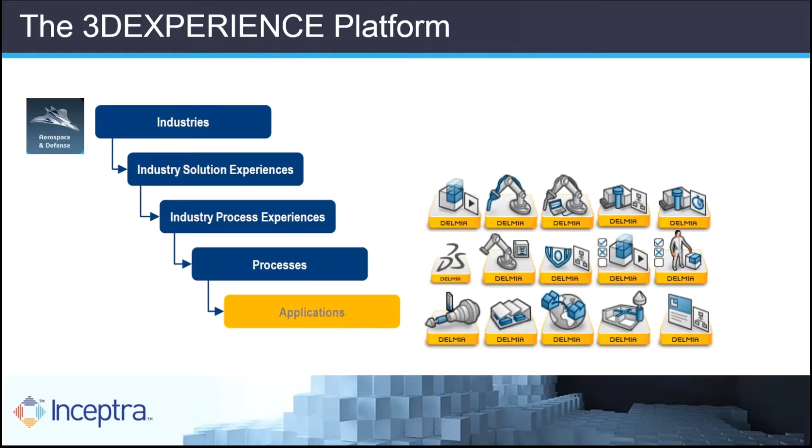There are four main manufacturing processes I'm going to focus on - these are manufacturing related. I'm going to touch on prismatic machining, milling machining, multi-axis, and mill turn. If you want to think about it in V5 terminology, these can be almost compared to workbenches, except now they're applications under the Delmia platform.

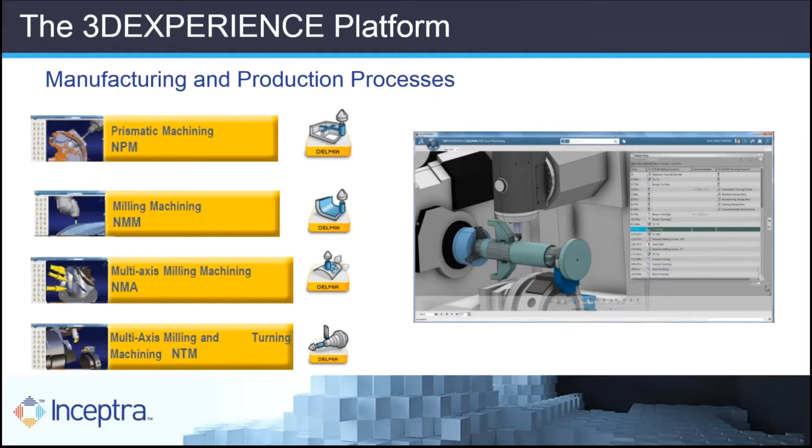And there are a number of advantages this gives us now that these are applications under 3DEXPERIENCE. I wanted to take a look at some of those key values, kind of explain where the differences are and what's new in 3DEXPERIENCE.

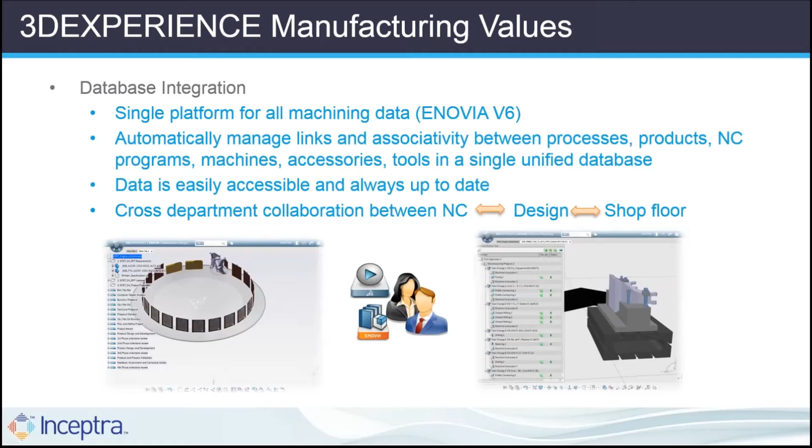So that's one of the key differences in 3DEXPERIENCE. We're now working with the database, and it's not file-based anymore. So let's take a closer look at the resources specifically.

The method in which we go about programming in 3DEXPERIENCE has changed. Our goal when we actually program a part is to first make sure we're using the correct machine tool, and make sure the resources such as tools, fixtures, vices, etc. are available, so we can manage the life cycle of those components. One of the key terms we have for this is called Resource Configuration Milling, or RCM.

I'll give a good example of this when we get into live demonstration, but the idea is we select a machine or machine cell that brings in all of the tools in that machine turret, all of the accessories available to that machining cell, and it represents what we have available on the shop floor. We'll look a little closer into what that means for us as programmers when we get into these demonstrations.

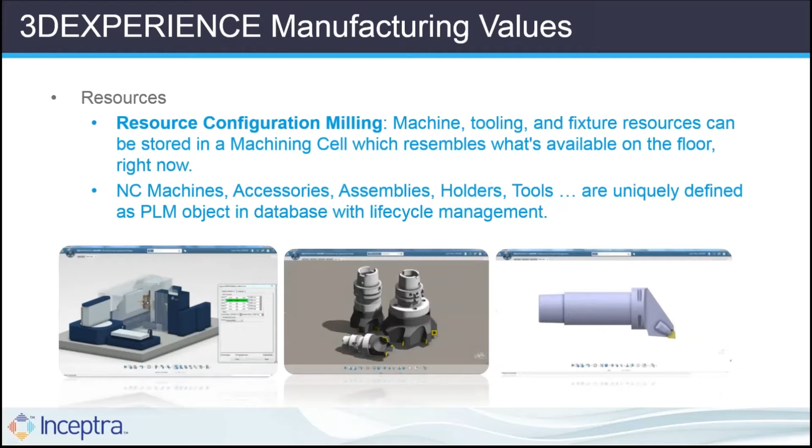Moving beyond the database and the resources, we'll take a look at some of the advancements in milling and mill turning. Because we're using these machine cells or resource configuration milling, we're setting up the complete setup - not only the NC assembly with our part and stock, but also fixtures, vices, clamps, etc., and tooling.

What that means is before we create any tool paths or insert any machining operations, we have the ability to confirm that a specific machine cell is going to work for the programming of our part. We can check the tool axis orientation, and we can check reachability before anything is actually computed.

Some of the other additional enhancements: we have a number of machining strategies added to the 3DEXPERIENCE platform, and a few new operations. One of those operations is the stiffener operation - we'll take a look at that in just a minute.

The other thing I'll note regarding milling is that the toolpath computation utilizes multi-core processors out of the box. What that means is the toolpath computation time is drastically reduced, and that's helpful for finished toolpaths or any large complex parts.

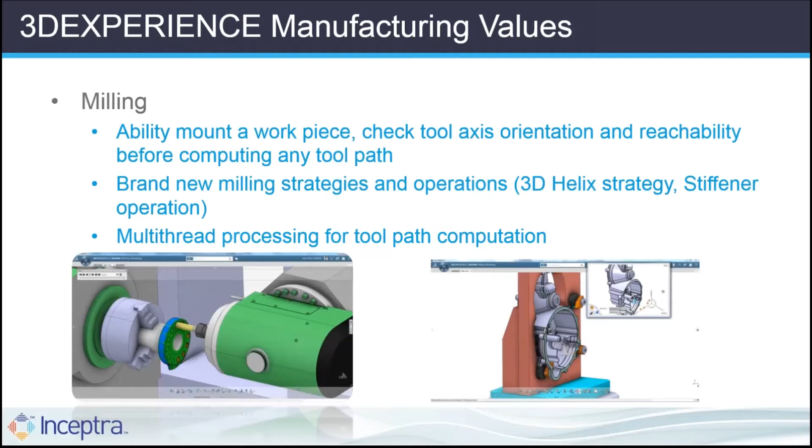Moving into the mill turn - mill turn and mill turn app simulation is available in V5, but the functionality has been greatly expanded upon. So we have the ability to specify multiple tool change and head change positions.

One of the key differences in 3DEXPERIENCE is that we have the ability to program the machine components themselves - the turrets, the counter spindles, etc. - as opposed to just only the tools. I have a great example of this once we get into it, to show you kind of the possibilities of the APT source simulation.

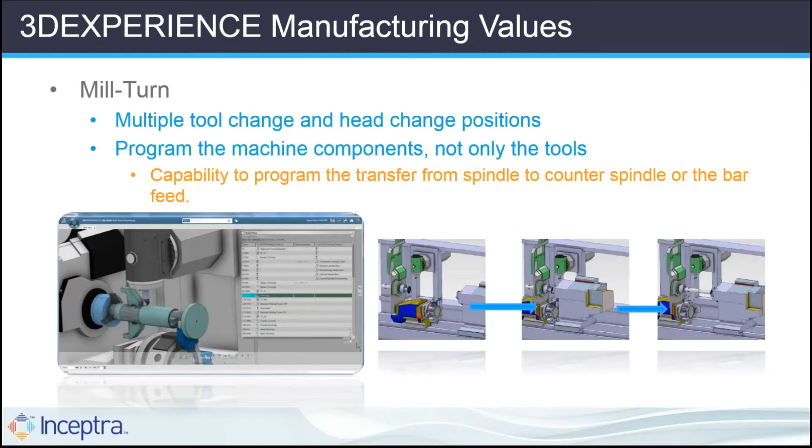I want to get an idea of how you're currently validating your tool paths. So that's one of the important things, and there are a couple of options there. Some of you may be using CATIA V5 machine simulation currently, or maybe some third-party application, or using some other method of some sort.

All right, Justin, so here are the results for you. So several people are using VeriCut, and surprisingly, there are some still not doing any validation. Okay, thank you, Jason. So thanks for that feedback, everyone.

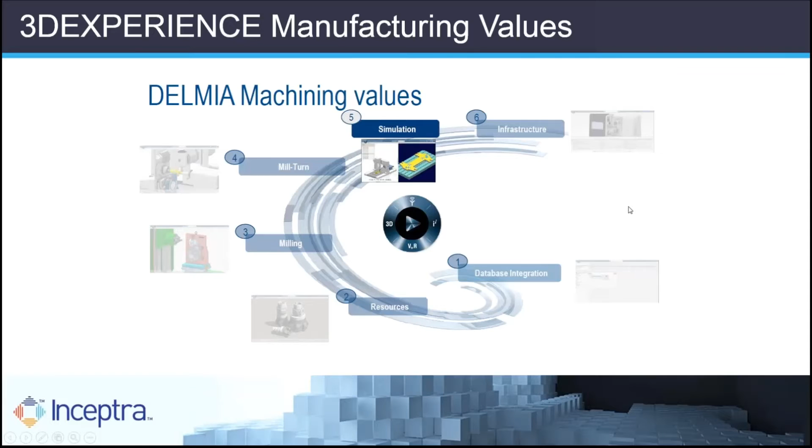So let's jump into the simulation, and there are a couple of key points I want to point out. One of the biggest changes in 3DEXPERIENCE for manufacturing is that the APT source or centerline simulation functionality is available out of the box, even with just a prismatic machining license or application.

That kind of goes along with what we're trying to do when it comes to resource configuration. Again, the approach we take to machining in 3DEXPERIENCE is now programming a machine tool and its accessories and resources to program a part, as opposed to just programming the part geometry like we were in V5. We'll take a look at a couple examples of this.

What that means is that with even just a basic prismatic machining license, you have the ability to simulate APT source using a defined machine. If you are familiar with or have used V5 simulation in the past, you'll notice significant improvements in the performance.

In 3DEXPERIENCE, it's been greatly improved upon. It runs much quicker, computations much smoother. And also we have the ability to actually save these simulation results into animations and play those back later.

We also have the option of exporting those animations out to 3D XML, so other users, such as operators on the floor, can actually play those back in a free player.

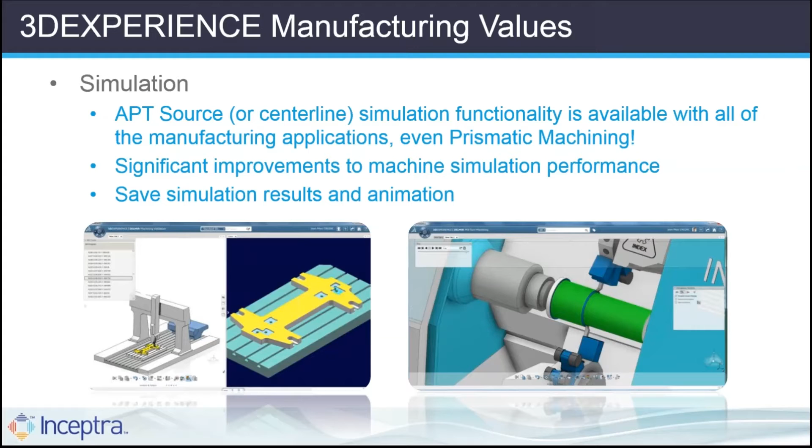So now what I'd like to do is jump into a demonstration of 3DEXPERIENCE, introduce everyone to the interface, what it looks like. We'll take a look at searching and opening objects in the database, and then talk about those resource configurations, also a couple of enhancements such as the stiffener operation, and then we'll take a look at an example of some APT source simulation.

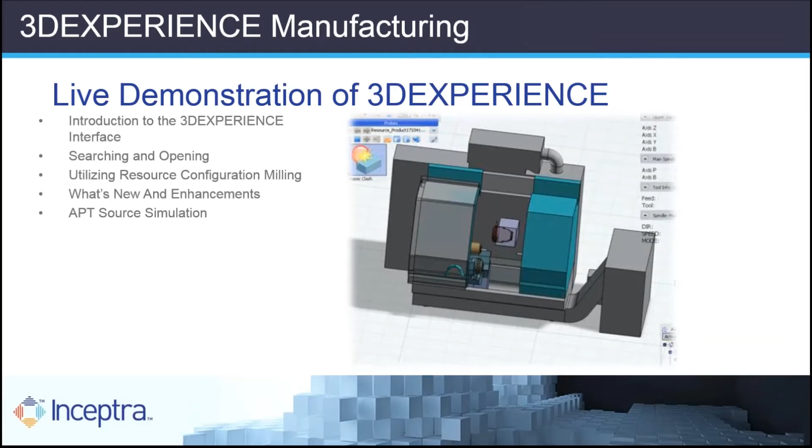So now on my screen, you should see the 3DEXPERIENCE interface. I'll just note that I'm in the Los Angeles area, and I'm actually connecting to our Inceptra database at the headquarters in Florida. So again, it's no longer file-based. I'm going to be interacting with objects that are actually up on our database.

Before we get too deep into searching and the like, I want to introduce you guys to the compass, which I had mentioned before. So we have four quadrants. Again, I want to focus on the 3D modeling. So once I click this, it's going to bring up a list of applications.

And again, you can kind of think of these as workbenches in V5. They're a little bit different. So we have a number of applications under 3D modeling, such as our assembly design, part design, drafting, etc. And then on the south portion of the compass, we have our content and simulation, which are manufacturing-related applications. And this is what I want to focus on.

So what I'm going to do is go ahead and start up my multi-axis machining application, and we'll take a look at the interface.

So right away, you'll notice that the interface is a little bit different, a little bit cleaner. But as we dig into it a little bit deeper, you'll see that there are some similarities to V5, so it's not completely new and completely foreign to us.

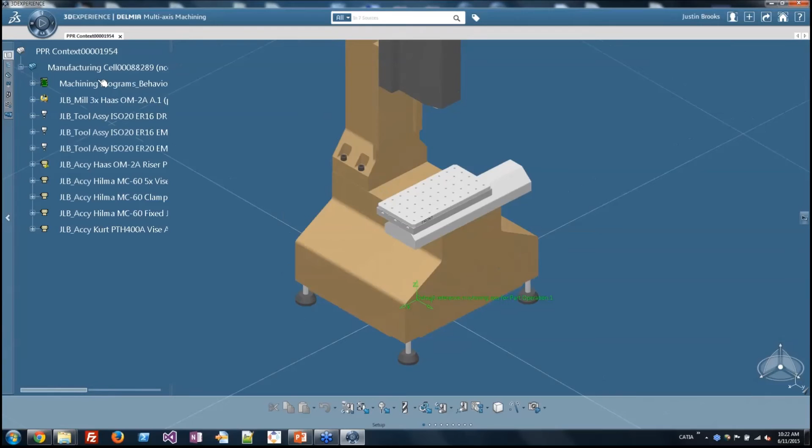Okay. So once this comes in, I'll zoom out a little bit, and you'll see we have our machine here. If I expand the tree, it's not only brought in our machine resource, but any tool or tool assemblies available on that machine, plus any fixtures that are available at that machine as well.

So again, the idea here is not just to bring in a machine tool resource, but everything else along with that. From here, I'm going to go ahead and actually associate a specific manufacturing setup.

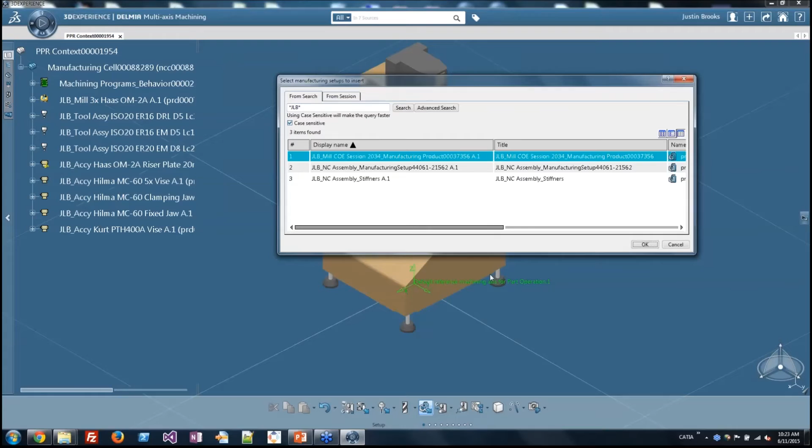So you can think of this as your NC assembly in V5. So again, because we're working with a database and not files, I'm going to go ahead and do a quick search. Again, I can always search for the database for a specific setup, or I can always select from the current session. So I'll go ahead and select that setup, bring that into my process here.

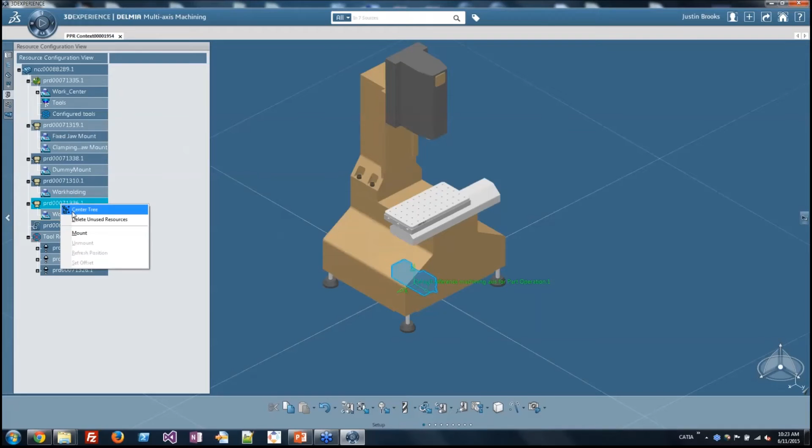And the next thing I'm going to do is mount the vice or our accessory here. So you see we have a number of accessories here. In this case, I'm interested in the vice, so I'm going to go ahead and right-click on that and select Mount. And it's going to allow me to actually position this on the machine.

So if anyone's familiar with V5 simulation, this wasn't always the easiest path, but in 3DEXPERIENCE here, it's a much more intuitive process. Okay? I'm just going to go ahead, specify the position of the vice on the riser plate there, modify the orientation. The next step I want to do here is actually set up my part operation.

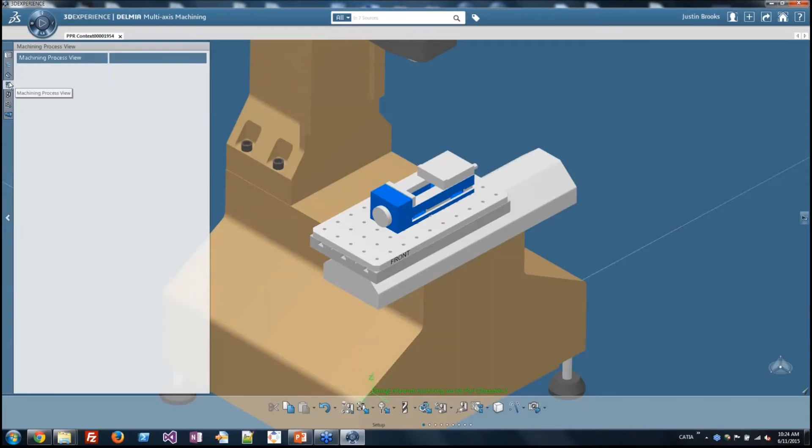So now we get into the portion of 3DEXPERIENCE that's very similar to V5. In this case, we'll look at the part operation. And the very first step here is to actually specify the NC assembly. And I also want to specify my stock and my design components.

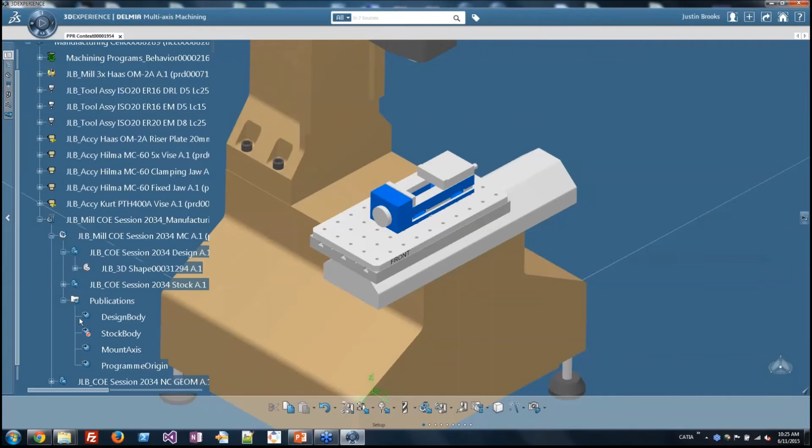So the picks, clicks, and dialogues you see here will be fairly similar. I'm going to go ahead and select rough stock design part, and we're also going to specify fixtures and our machine. So we'll take care of that. You'll see a lot of these dialogues are fairly similar to what we have in V5.

So we have a much cleaner, nicer interface that's not too different from what we've been working on in the past. I've set up my part operation. The very next thing I want to do here is actually mount my workpiece into my vice, so I'm going to bring up the mounting window here.

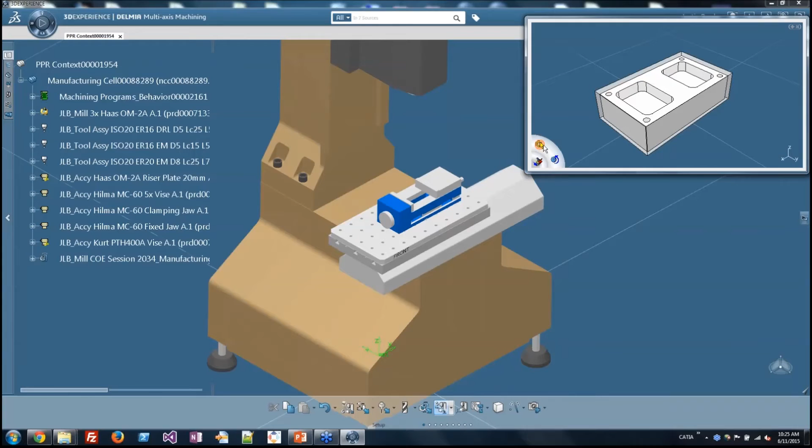I'll select my axis system, and we'll see that we get an interface that allows us to adjust the component here. So let's specify some offsets and just position this to my liking. Once I'm happy, I'll go ahead, click OK, and confirm that.

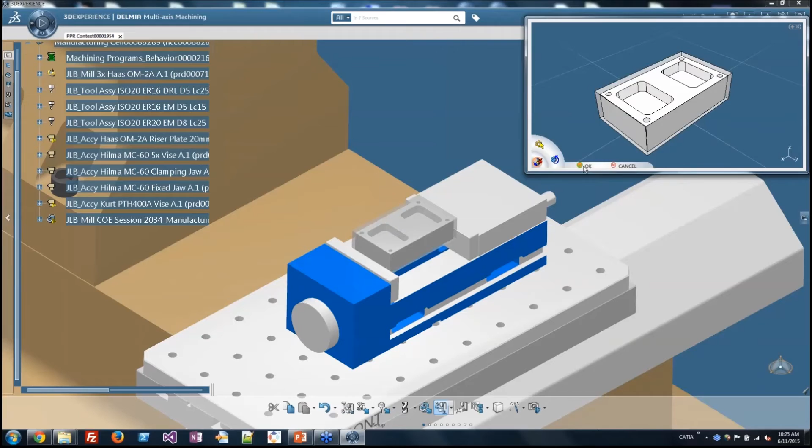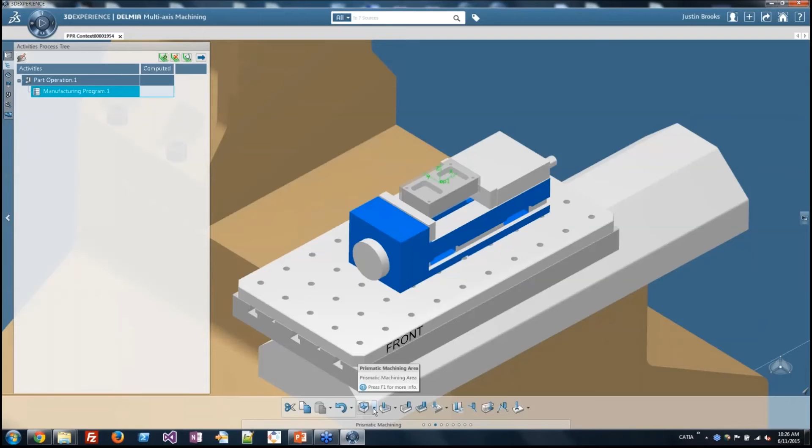Now I've set up my machine tool, the accessories, the riser plate device, and then my design part and stock body. From here on out, I would program my part very similar to how I would do it in V5. The difference here is we have a slightly cleaner interface, and we're setting up the setup to represent what we actually have on the floor.

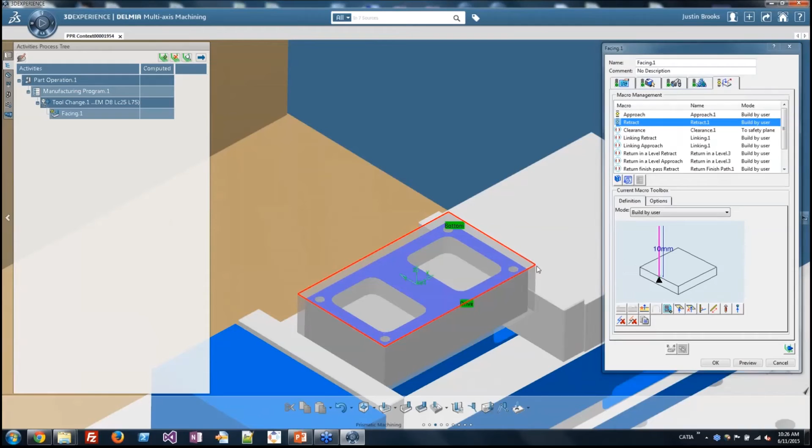So what we're trying to avoid here with resource configuration is selecting devices that aren't actually at the machine, or selecting tool resources that aren't actually part of the machine itself on the floor. And what we achieve by doing this is a more efficient and streamlined manufacturing process.

So go ahead and insert a simple facing operation, and we get a preview of our tool path, and I can always jump into the material removal. This is just a very basic example of setting up a 3-axis machine with some accessories and positioning our component.

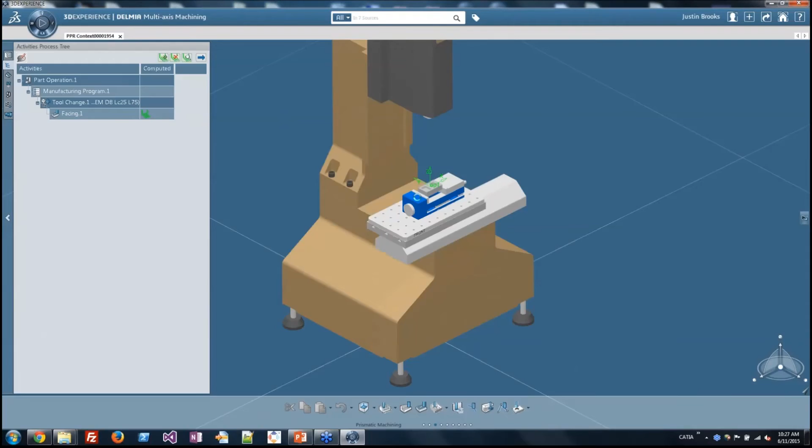With that, I want to go ahead and take a look at another process, take a closer look at some additional options that we have and one of the brand new machining operations. So I'm actually going to open up a part.

So the first thing I want to do is actually search the database for a specific PPR. I'll go ahead at the top here, type in a portion of the name, and it's going to return results from the database with matches here. So we get a lot of previews here for certain components, and I can kind of drill down, search for other specific types of components.

But one of the biggest benefits we have with this being the infrastructure behind the scenes being a database is that there's metadata associated with these objects. And through the use of tags, I can actually drill down and locate exactly what I need.

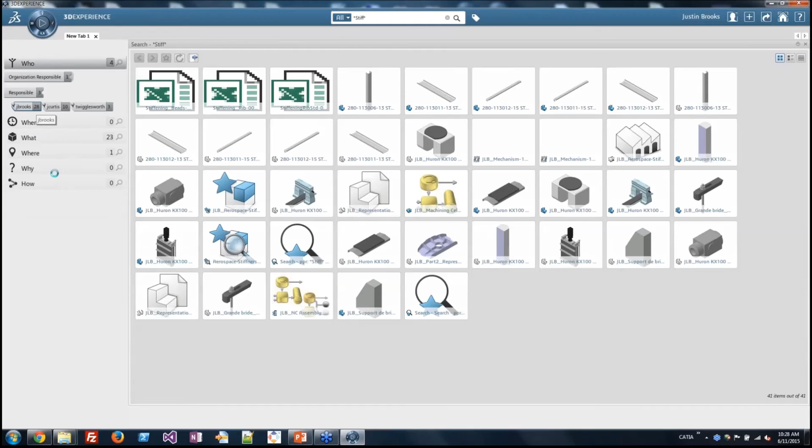So I've searched for anything with this term in it, but I'm going to drill down and take a look at things that I've created. And then more specifically, I want to look at PPR context that I've created. So as I add tags, it's going to narrow my search to any objects that match this criteria.

And this is hugely useful. Again, there's an innumerable amount of metadata on these objects that we can search against, and we can also save these into favorites for later use. So I've located the PPR process that I'd like to work with.

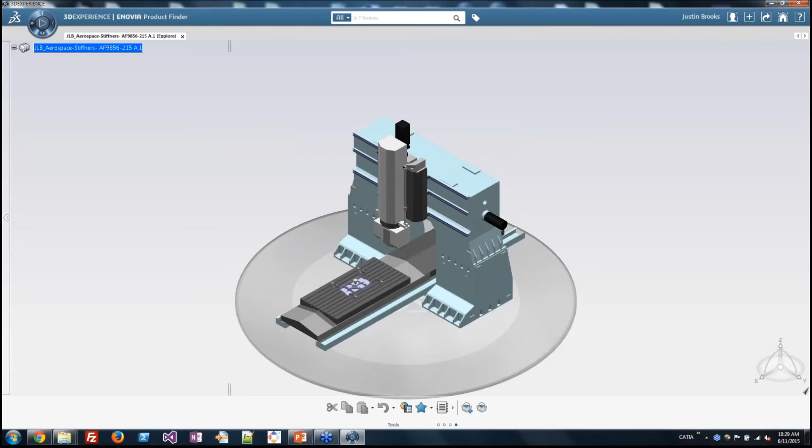So I'm actually going to right-click and explore this, and give you a preview of what we call the navigation layer. So before committing an open and actually opening this machine resource, accessories, NC assembly, etc., if we were to explore this, we get essentially a 3D thumbnail that acts as a preview for the object we're going to open up. So this is extremely lightweight, quick, and it allows us to confirm that we've opened up or explored exactly what we're looking for.

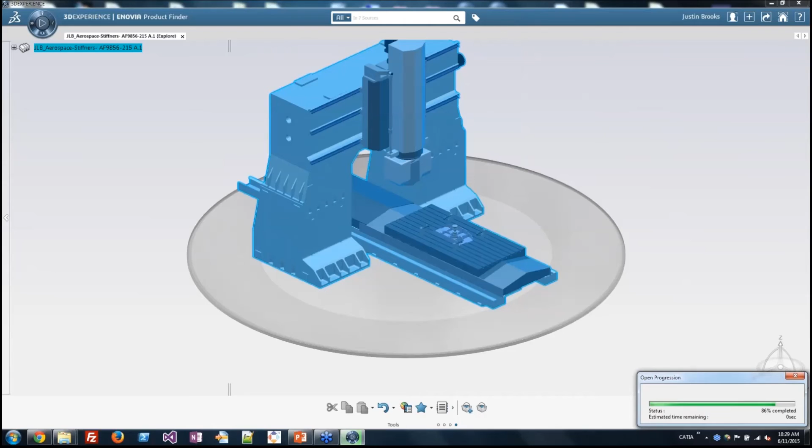So this is what I'm looking for, so I'll go ahead and just open this. And that's going to bring us into our manufacturing application. So again, no more files - we have the objects in the database. We're able to search for those objects using tags, preview our selection, and then open that and begin our programming.

So with this PPR open, we have some items set up here currently at my part operation setup and some other things like that. So I want to go ahead and revisit the 3D mounting.

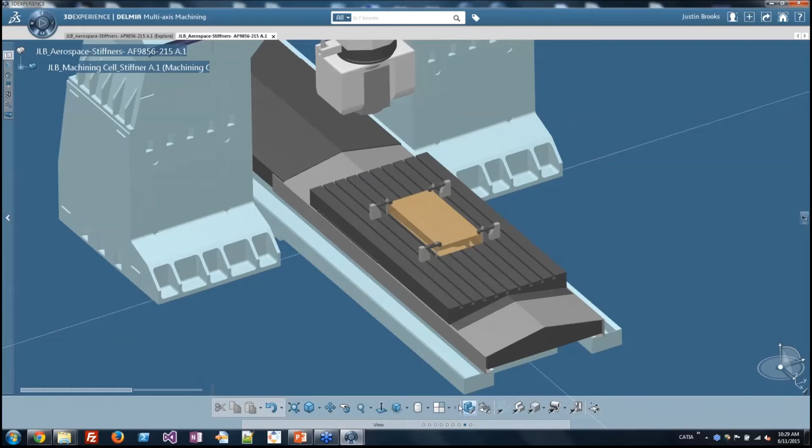So let's go ahead and turn off our stock and take a look at our 3D mounting reachability test. We looked at this really quickly on the last part. We're able to mount this to the machine, and it's already in the mount position. What I want to focus on is the option to check reachability.

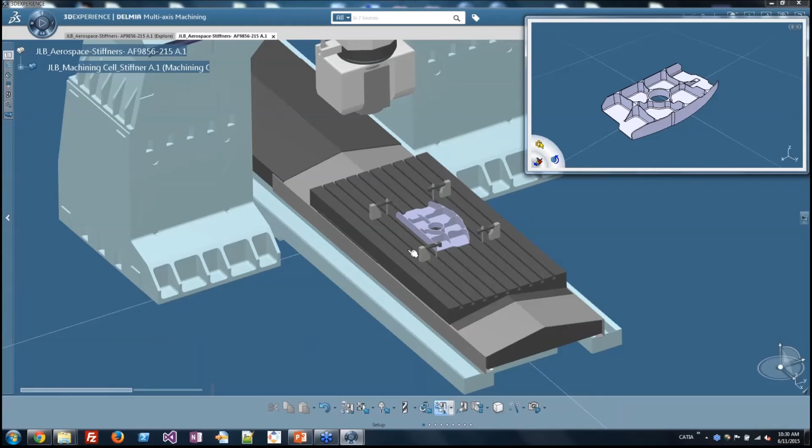Before I even create any toolpaths on this part or specify any machine operations, I can come in here and check and make sure that what I need to machine on this part, I am able to do on this machine. So anywhere I click in the preview box on the part, it's going to position the tool there.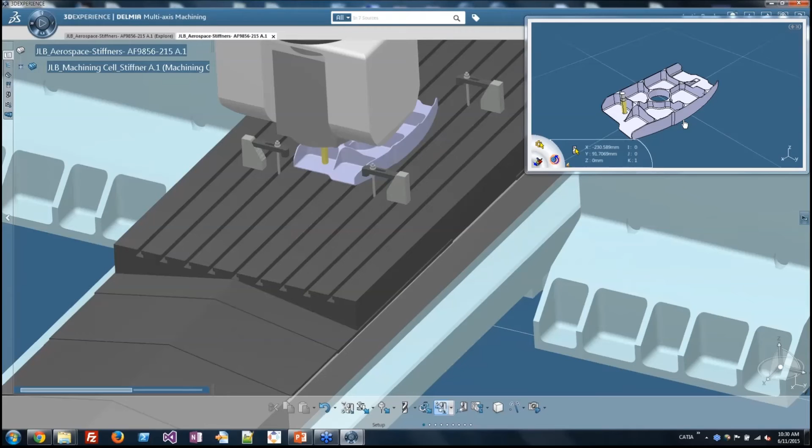So if I come over here on the outer wall, click to position the machine, I can actually click and drag the tool axis to modify that. As soon as that tool turns this teal color, it means I'm out of bounds, so there's some kind of travel fault and we can't reach that.

This is a great way to check and make sure that a specific machine, a specific setup, is going to work before we have to create all the tool paths. This allows us to recognize any issues up front and take care of those before we spend time actually programming.

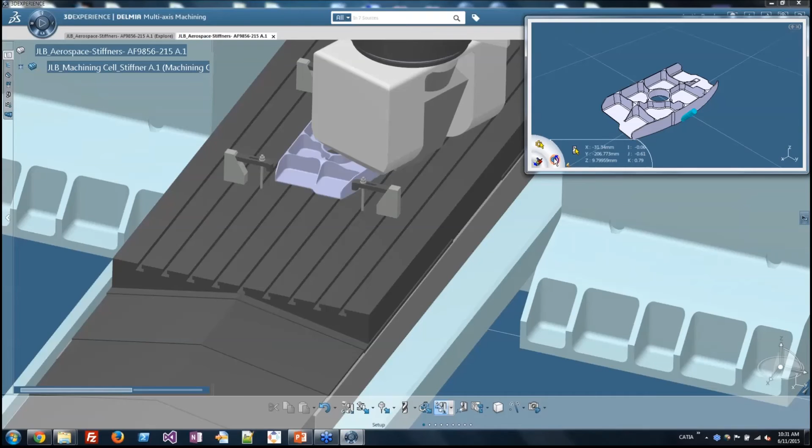So I'll go ahead and jump onto this. Click OK. And we'll take a look at the stiffener operation, which is one of those brand new operations that is not available in V5. Go ahead and open up this operation.

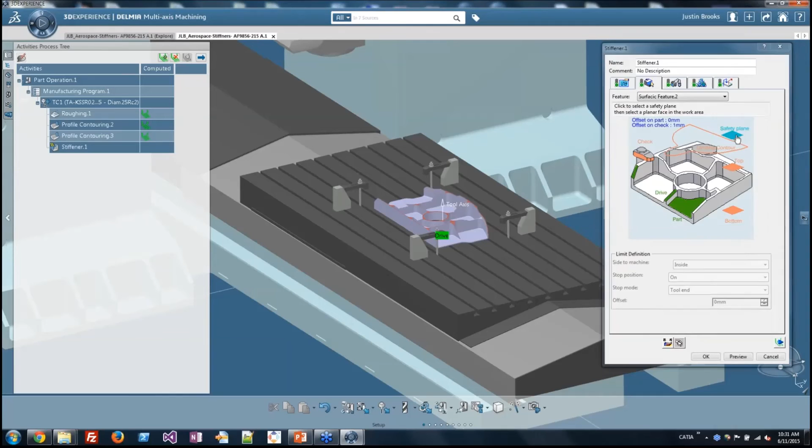One thing you'll notice right off the bat if you work with V5 manufacturing workbenches is that the definition dialog is very similar. It's got the same 5 tabs here: our parameters, our picks and clicks for specifying our part, drive surfaces, safety plane, etc. are very similar. We have a different interface, a much cleaner interface, but it's not a huge departure from what you may be used to.

So I'll go ahead and specify the geometry here. The idea behind the stiffener operation is to quickly finish the tops of the ribs for structural parts like this in one single operation instead of having multiple operations.

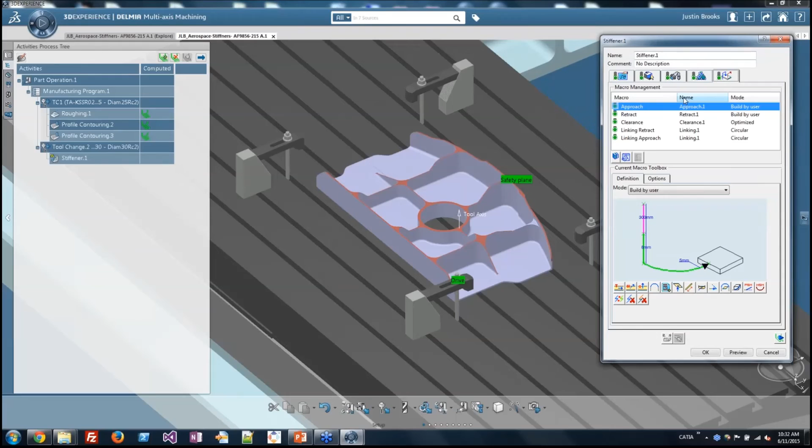Again, this is a machine operation that Dassault implemented in 3DEXPERIENCE that's not available in V5, and this came about as a result of requests from the user group. Essentially, they wanted to be able to finish these stiffeners quicker on the parts. So Dassault R&D went ahead, developed this, and it's now included in 3DEXPERIENCE.

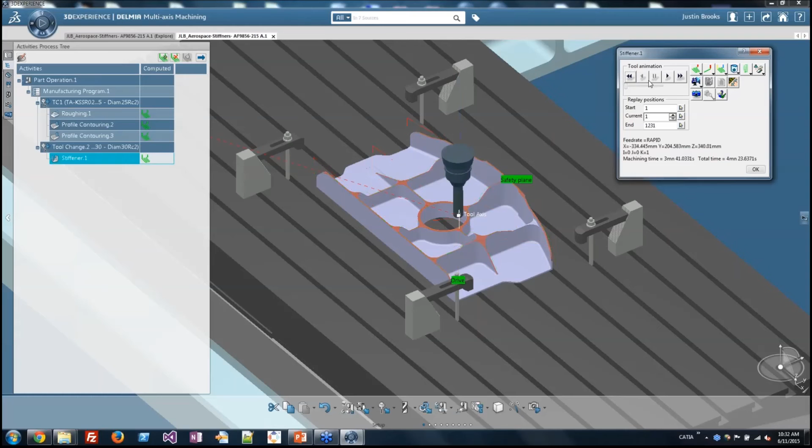Once I generate the toolpath here, I can go ahead and step back and kind of replay that and get an idea of what that's going to look like.

At the top of the webinar, we had a quick poll regarding how many enhancements there were in 3DEXPERIENCE over V5, and the answer is a lot. There's continual improvements - 2016X comes out with additional stuff.

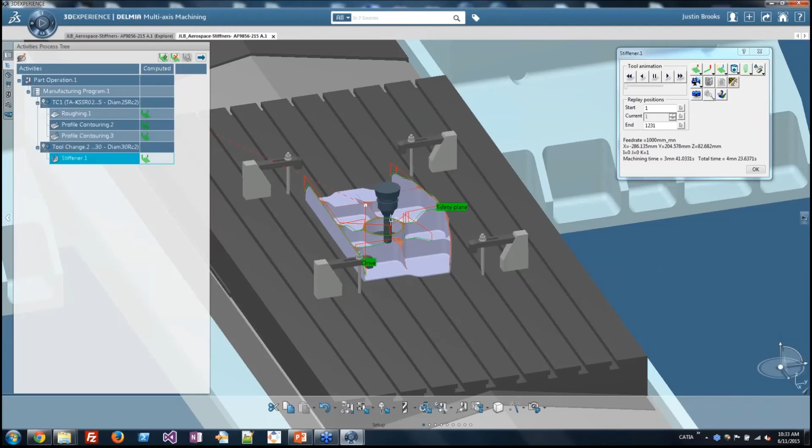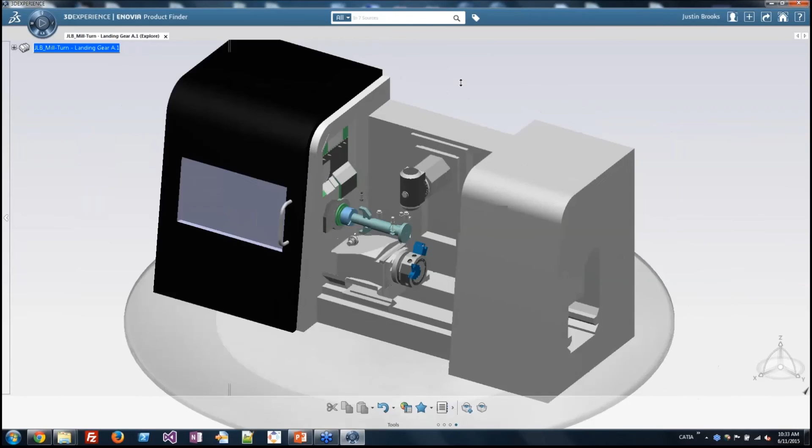So again, I'm going to back up, and this time instead of searching and using my tags, I'm just going to go to my favorite content, and we'll see the PPR that I've actually saved before. Looking at my favorites here as a thumbnail, I'll go ahead and open that. We'll get the preview, which allows me to confirm that this is what I'm looking for. Looks good, so we'll go ahead and open that, and we'll go into the machining workbench and take a look at the simulation.

One thing I'll point out here is that I am in Southern California, and I'm actually pulling the data down from the Florida server. So one of the other benefits to being...

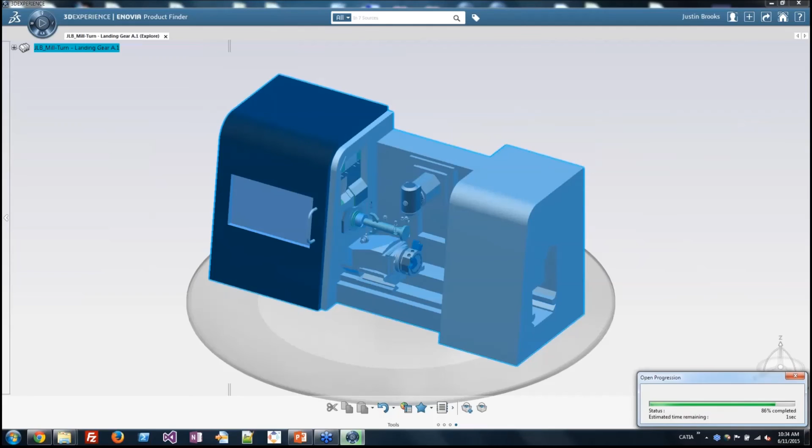Things being stored as objects in the database is that we can stream the important parts of an object. So instead of having to load everything in the machine, things are loaded lightweight. Any changes are streamed back to the server, so it's a much more efficient process when it comes to updating and modifying than we had previously with files.

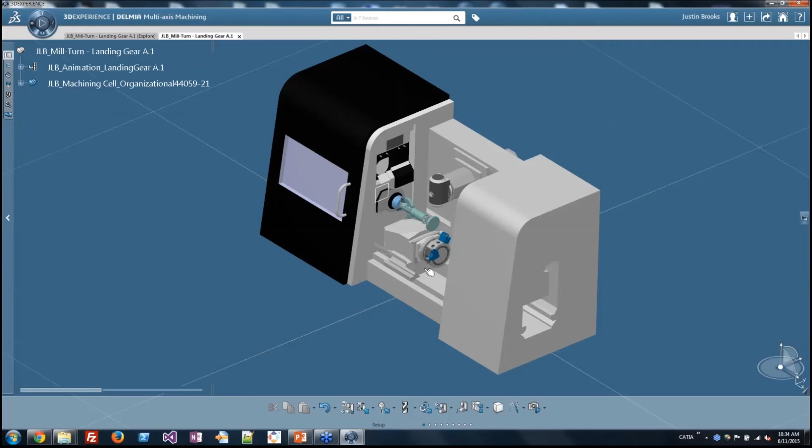In this instance, I have a machine tool resource set up. I actually just want to take a look at the part operation here - a number of tool changes, and more importantly, the machine instructions divided into 2 programs here.

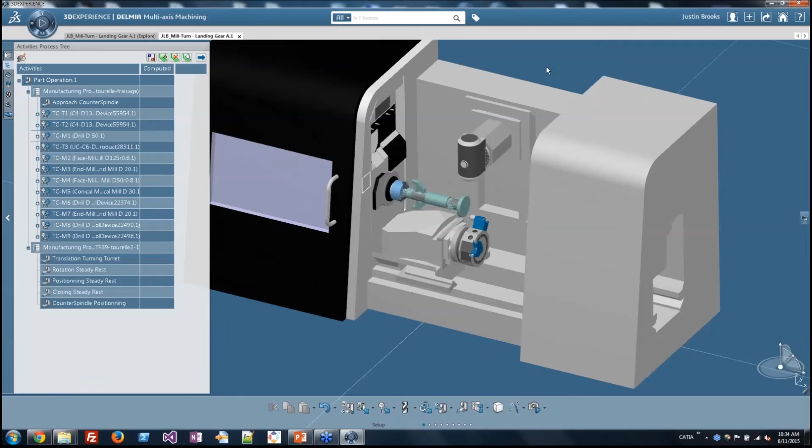One of the points I mentioned before is not only are we programming a machine tool instead of the part geometry itself, when it comes to these more complex mill turn machines, we also have the ability to program the accessory, the counter spindle, and the steady rest.

So I'm going to go ahead and just take a look at synchronization here. Again, with the mill turn application, we have complete control over the synchronization of tool changes, operations, movements in the accessories, etc.

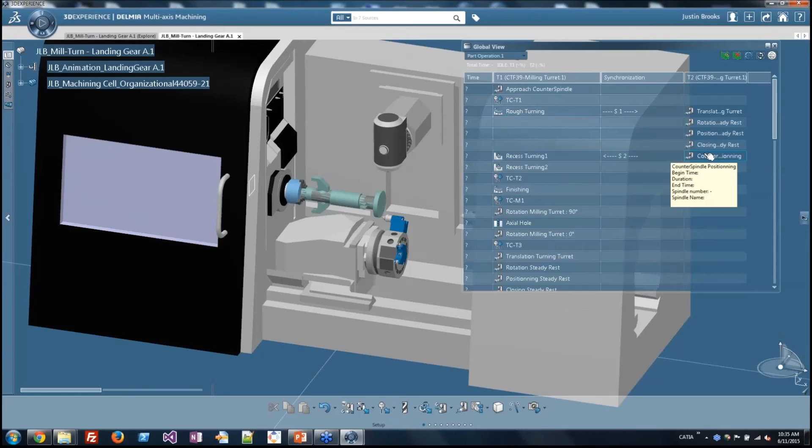So what I'm going to do is step back and jump into the app source simulation. To get to it, it's simply one click. I'll go up to the top here and click my play button, and it's going to bring me directly into my app source simulation. Once that comes up, we'll get a little play dialog box, and we'll go ahead and play that, and I'll show you a few options we have.

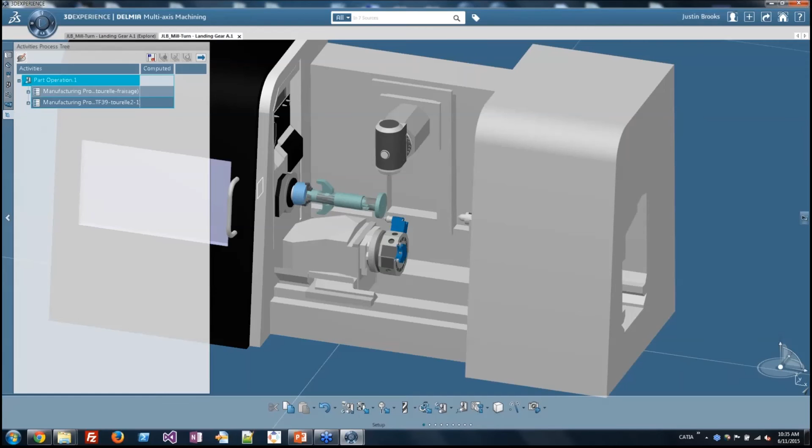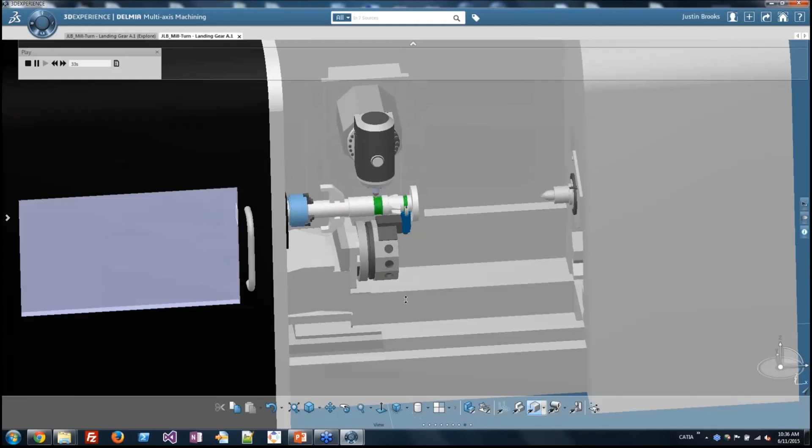Okay, so now we're in our app source simulation. I'll go ahead and hit play, and you'll see we get complete visibility of the program itself. Let's go ahead and turn on the stock and the part, and actually rewind that a little bit to show that one more time.

You'll notice as the program starts, the counter spindle is going to come up. It's going to run out the roughing contour, and then our rest is on our turret. It's going to position itself for the next operation.

So again, we're not just programming to the geometry. We're programming the tool with its resources, we're programming its accessories, and we have complete finite control over all the motions. More importantly, with our app source simulation, we can detect any issues up front, any collisions between the turret, spindle, anything like that. And we're in the same platform, so there's no conversion.

So let's take an example with V5. If we're using V5, we could program to the part. We get a program, we can send that out to a third-party application. There's some translation involved, some setup there. Here, just by clicking one button, I'm instantly brought into the app source simulation.

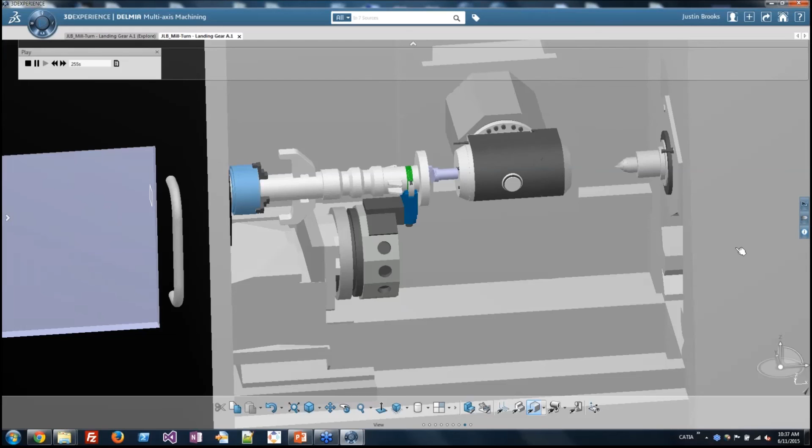I can play back and catch any of those errors. Ultimately, what that means is that I'm able to program more efficiently, catch any errors up front that would cost me time to correct if the validation didn't catch it. The other benefit is that when we program our machine, we have visibility to everything. There's collision detection, fault lists, all of that good stuff that we need to validate what we've programmed is available to us in one single platform.

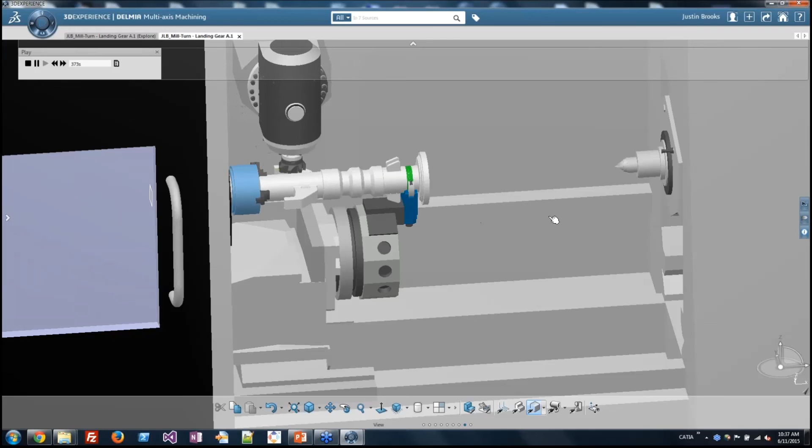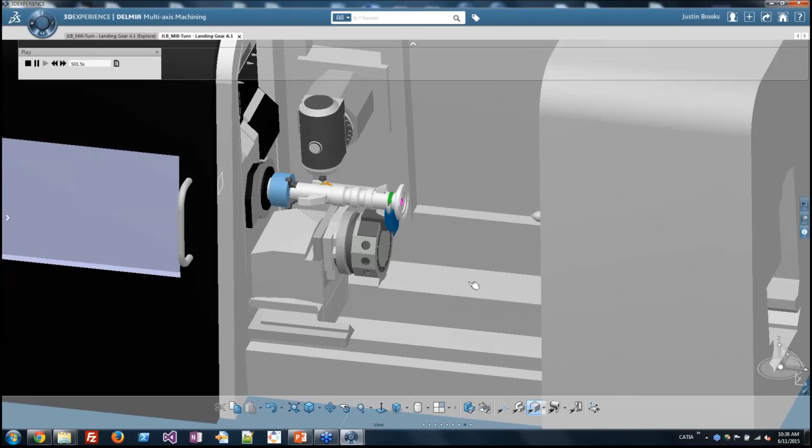The other thing I'll note, and hopefully it's coming across over the webinar here, is that the actual simulation itself is running very smoothly. So just in my experience from using V5 machine simulation versus the 2015X platform, it's much quicker, much smoother, and much more stable.

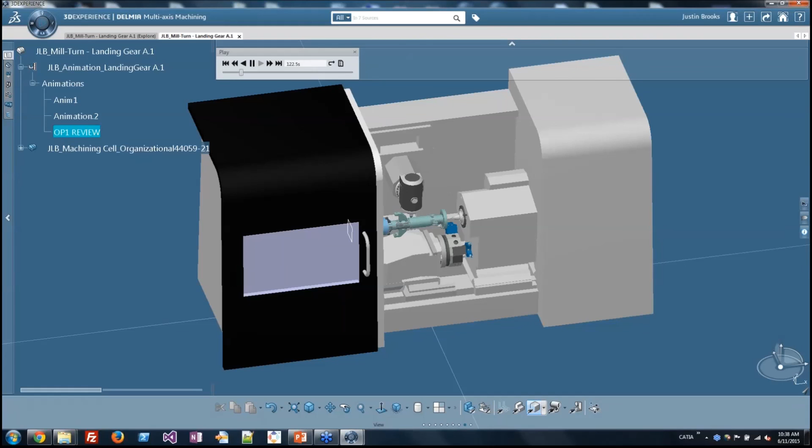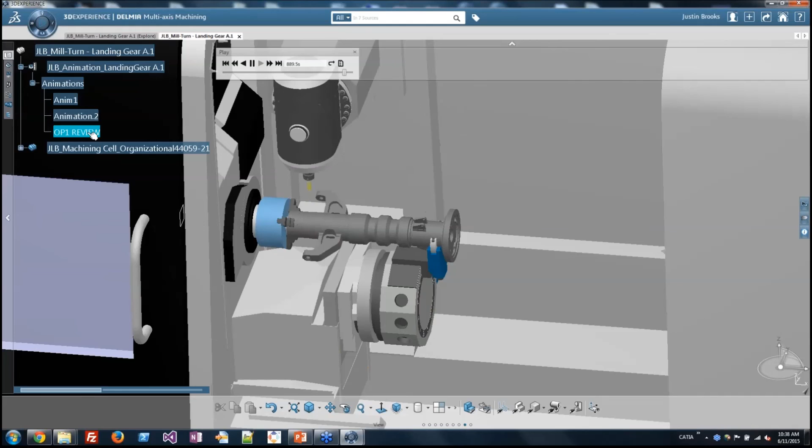So what this means is that if we come back to this PPR or process later and want to investigate the simulation again, we can just pull up the review. We also have the ability to export these animations out to 3DXML, so other users such as operators can view what the machine can do or review this animation in a 3DXML player. The idea there is we more effectively communicate what exactly is expected to happen on the machine tool and inform the operator as to what to expect.

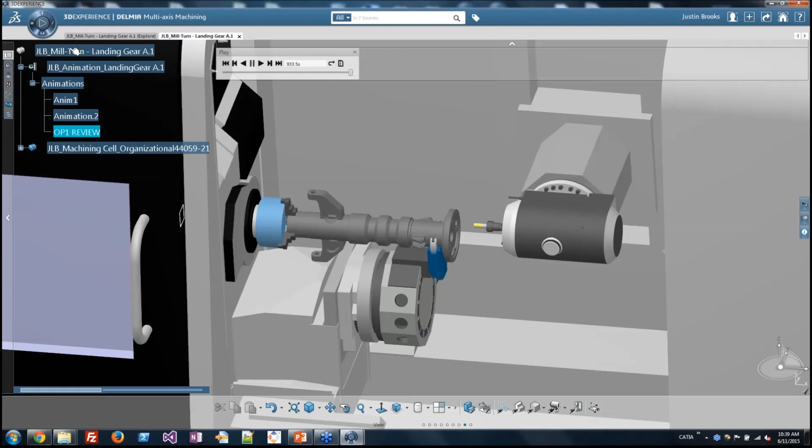So hopefully this has given everyone on the call here a good overview of not only the interface, but the database, some of the enhancements available to us. So let's recap what we've looked at today.

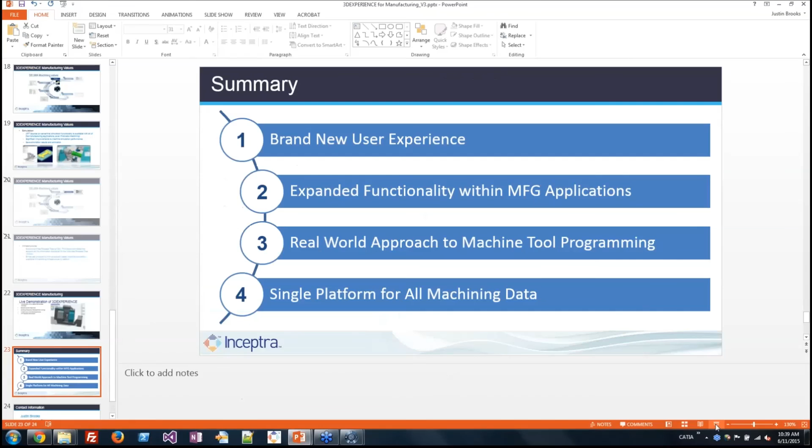First of all, we have a brand new user experience. Not only does that mean we have a brand new user interface, but our different applications, whether it's CATIA, DELMIA, Simulia, etc., that's all found under one, or organized under one experience, which is now the 3D experience.

With that, the manufacturing applications have been enhanced. So there are new manufacturing operations, such as the stiffener operation, which we've just looked at. We have the ability to organize machine tools, resources associated with that tool into what we call machine cells, and reuse those to actively...

...machine tool itself, and achieve all of those benefits that we discussed before. And lastly, to hit on that one point, it's not file-based. All the machining data is stored in a database, which is fully searchable and easily manageable when it comes to versioning, creating duplicates, etc.